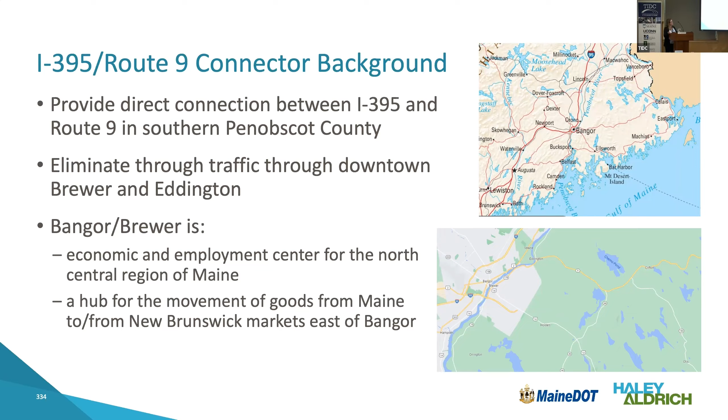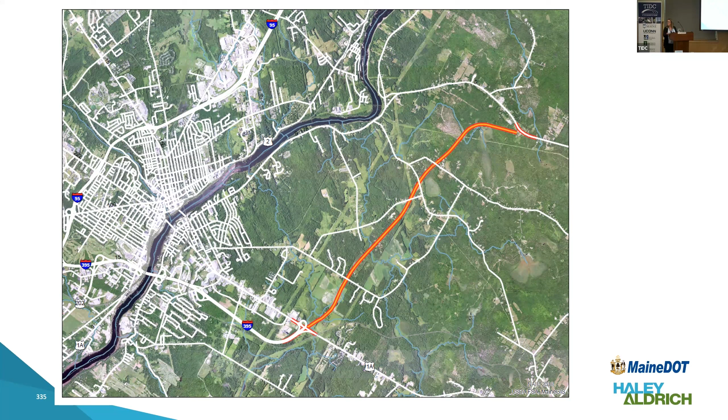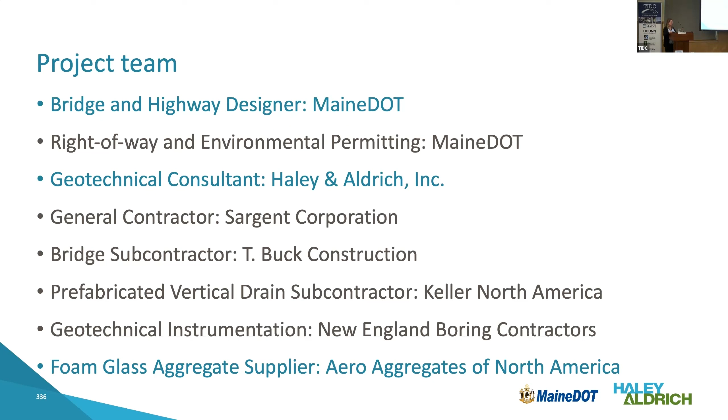If you've noticed in the news, the Philadelphia bridge that collapsed earlier this year—Aero Aggregates provided foam glass aggregate to fill that span and get the roadway opened temporarily. So they were instrumental in that project.

The project is 6 miles long of new roadway, which is a little unusual these days. There are embankments over compressible soils, which is really the focus of what I'm talking about today—there are 3 areas we're calling special embankment areas. In addition, there are roadway crossings: snowmobile, stream, wetland, and wildlife crossings.

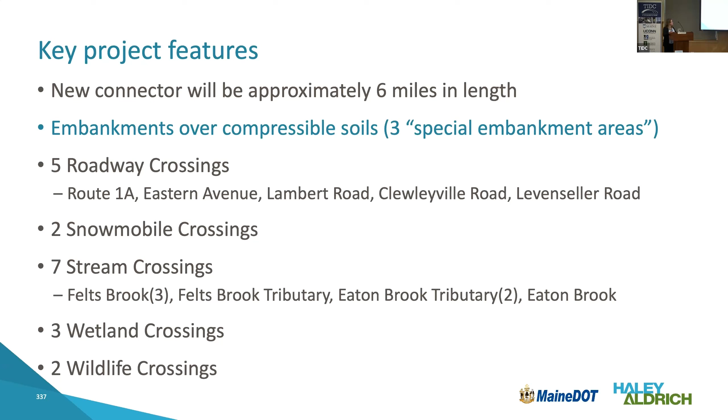The timeline started all the way back in 1998 when the DOT and FHWA began a corridor study. An alternative was chosen in 2016, and then the design team started work in 2018. Final design was complete and the project was advertised in the fall of 2021. Construction started in January of 2022, and it's ongoing now - we're really in the throes of it. It's on schedule to be complete in July of 2025.

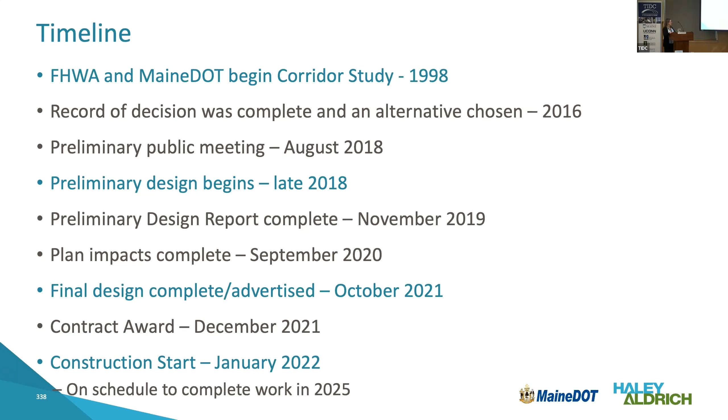We did a lot of subsurface explorations - borings, geophysical testing, and CPTs. We had about 250 borings along this alignment to fully characterize everything.

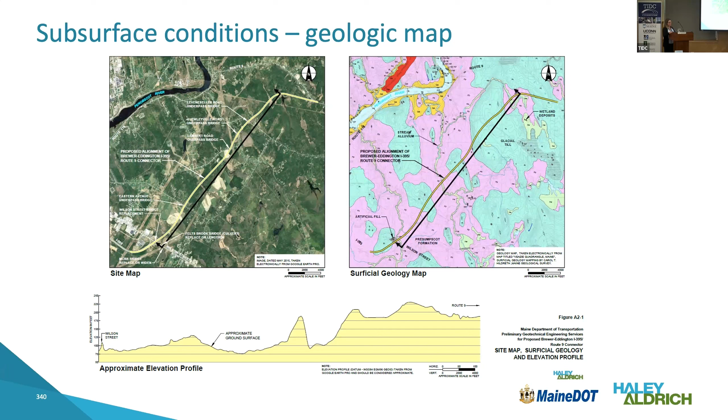This is just one typical piece of a profile to show the subsurface conditions. Here it's coming off some of the embankments at the southern end of the project. We're placing new fill to meet those existing embankments, and that's being placed over this marine deposit that is fairly soft, shown as the blue deposit. Below that is glacial till and bedrock.

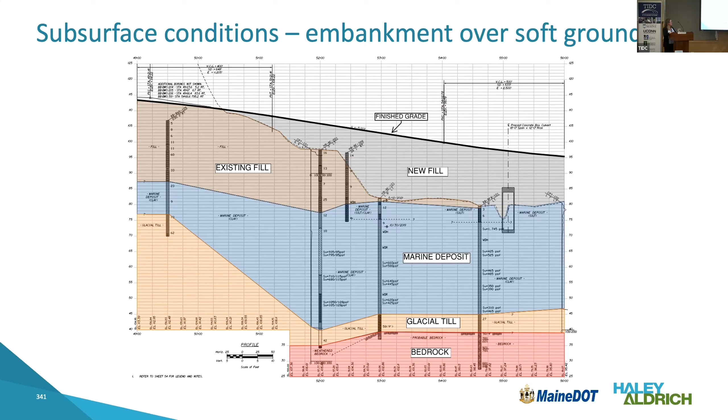As far as the general process went, we identified 4 areas that had clay - up to 34 feet of fill over a range of clay thickness, up to 42 feet. Through the preliminary and final design process, we were able to eliminate one of these areas, so only 3 required special construction.

We assembled all our field and lab data, selected soil properties specific to each area, and performed settlement evaluations compared against the project criteria that Maine DOT had provided. We also performed global stability evaluations, both temporary and permanent. The temporary evaluations actually controlled the design in many areas because we couldn't place the full height of embankment fill and have the embankment be stable.

So we needed to place a part of it and let the clay gain strength before we could place the full height of fill. That definitely impacted some of our design decisions.

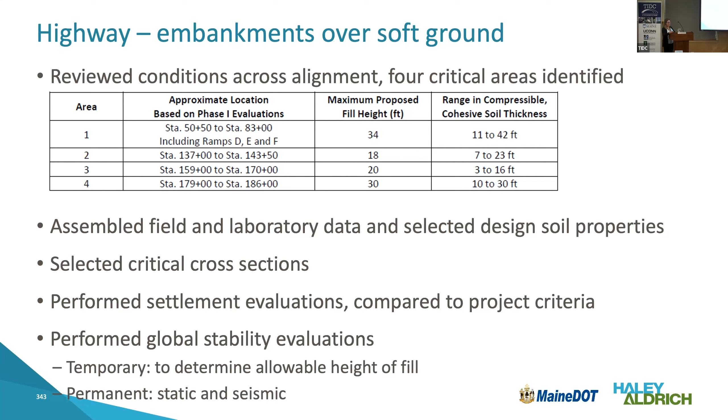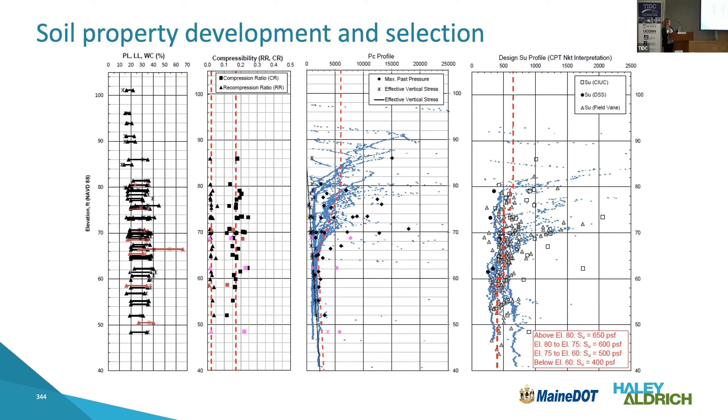This is just a summary of some of the soil conditions in one area. It shows the magnitude of data we had from both in situ field testing and lab testing. For geotechnical engineers, the selected undrained shear strength ranged from about 400 to 650 PSF in the clay at this particular location - so fairly low strength clay.

The approach we selected is primarily a preload surcharge program - placing fill, letting it sit for 9 months to get the settlement out before constructing the final roadway surface. We needed to do some load balancing because we couldn't place all the fill at once, and sometimes you can have a second hold period - place fill, let it settle, then place a second stage. But the project schedule didn't allow that.

So in our second stage, instead of placing all normal weight fill, we did a combination of normal weight and lightweight fill.

The program includes prefabricated vertical drains installed through the clay, which accelerates consolidation - normal weight fill for stage 1, then normal weight and lightweight fill for stage 2. We're monitoring performance of the program with geotechnical instrumentation.

There were 2 culverts where the sequencing didn't let us put the wick drains in, so it made more sense to use a full height lightweight fill there - the entire embankment adjacent to those 2 culverts is constructed of lightweight fill. The selected lightweight fill option is foam glass aggregate.

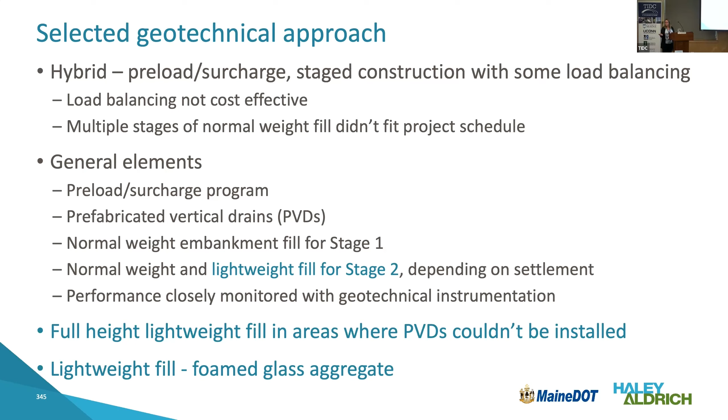Here's a typical cross section. During the initial fill placement, you'd place it up to the red line here, normal weight fill, let it sit for 9 months or so, and then excavate back down and place lightweight fill in that yellow area. So the finished embankment, and that detail varies along the length, but you end up having lightweight fill in the upper portion of the embankment.

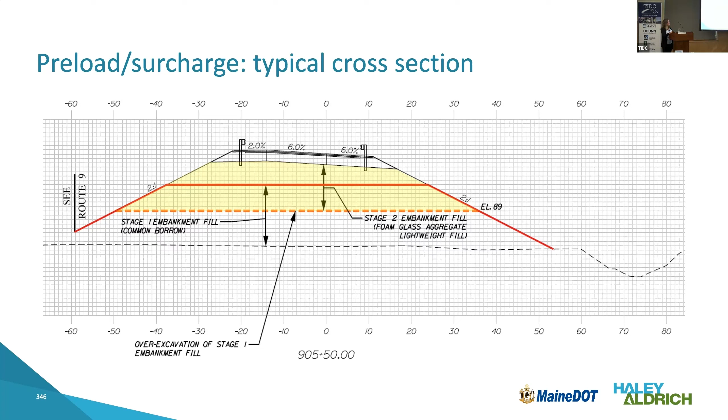Here's a profile through the 2 culverts I mentioned. Here the lightweight fill is included for the whole height of the embankment, except for the roadway section on top, where there's about 2 feet of normal weight gravel and the pavement on top of the foam glass aggregate.

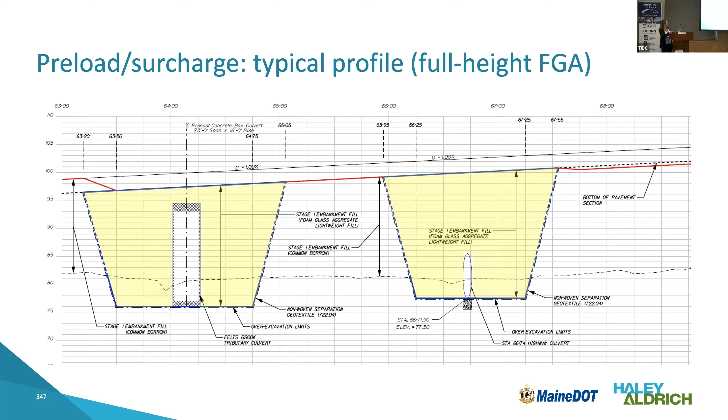So the next group of slides, Aero Aggregates provided, and they're the ones producing this and really have the data, so I want to give them credit here. Archie Filshill is their founder and CEO, and is always very happy to talk about this product. He's provided me this information.

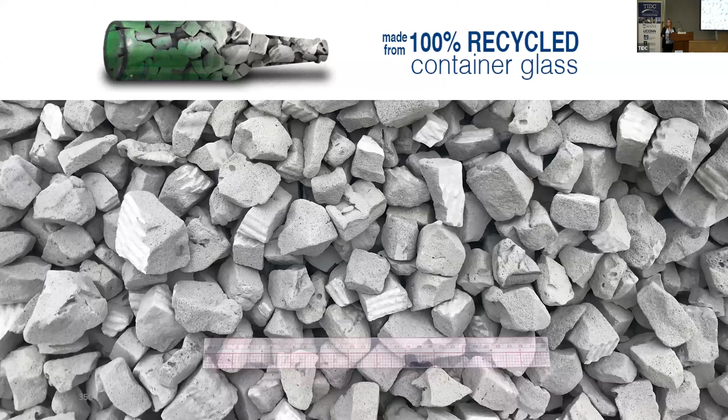So this is what it looks like. Those aggregate pieces are about 1.5 inches in diameter. But it really is not that different from a normal aggregate, it's just a very different weight, and it has definitely different properties.

So here you can see it weighs only 15 pounds per cubic foot compared to normal weight fill, which is 120 to 130 pounds per cubic foot. So it really helped with our settlement challenges on this project.

And it has a very high friction angle. They have test results that show it has a friction angle of about 54 degrees. We did not use that high of a friction angle, just given that it was a little bit new to us and new to Maine DOT. In addition to that, it's a good insulator, it's frost resistant, and it's very free draining.

Some of the earlier applications of the product were for some of these other reasons.

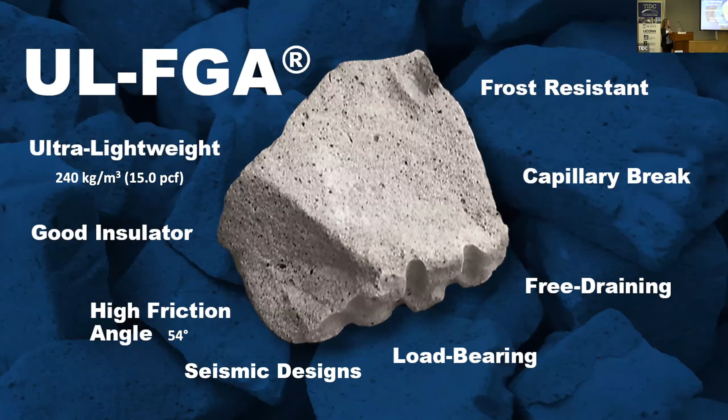So the process of making the material: they start with recycled glass, just normal bottles and jars that we all recycle. They remove any paper or metal or anything on it, and then they pulverize it into a very fine powder. Then they mix in a very small amount, like 1% of foaming agent, which is also a powder. So they have this mixture of powder that they lay out on a conveyor belt in a thin layer, and then that passes through a kiln that softens the material, which he described as sort of like baking a cake.

So on the other side of the kiln, the conveyor belt comes out with a cake-like material. In the heating process, that foaming agent has now created bubbles in this material, so it comes out in kind of a sheet with bubbles. And then when it hits the cooler air inside the facility, that causes it to crack. So they don't need to do anything to process it and crack it, that just happens with the thermal differences.

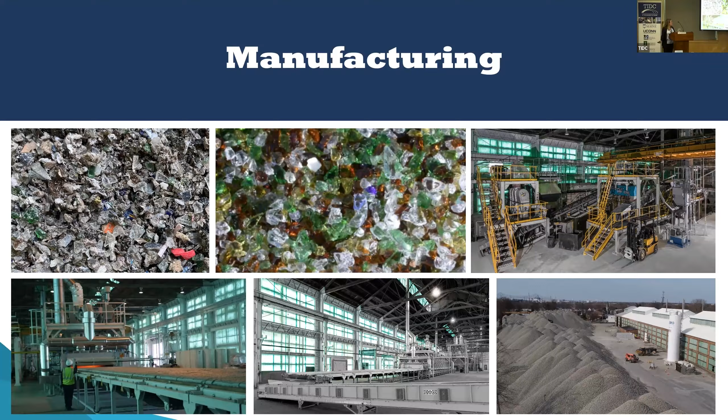The product primarily started in Germany in the 1980s. In the 90s, though, Norway started using it as a thermal barrier, to prevent frost heave, and that sort of led to these lightweight uses or applications.

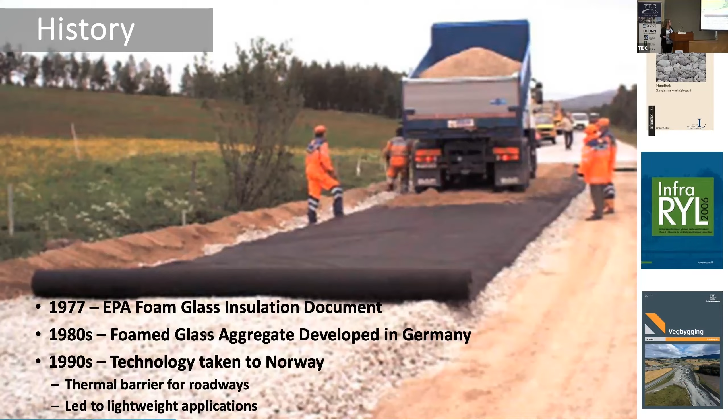So this just shows some of the applications. The top half are the infrastructure applications, so like we're using at Brewer, we're using it for embankments. We've also used it behind retaining walls and bridge abutments to reduce lateral loads on abutments. You can use it to backfill tunnels, culverts, and utilities.

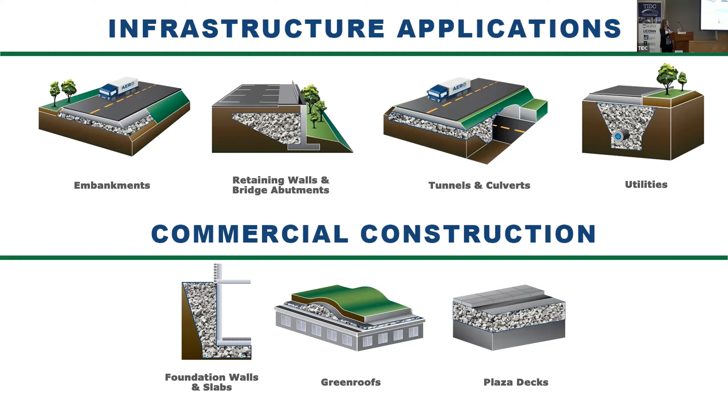The material, when it's placed in the field, rather than measuring compaction like you would for a normal kind of sand and gravel fill, is really placed using this method spec, meaning that we define certain lift thickness and means and methods, and then use that throughout construction.

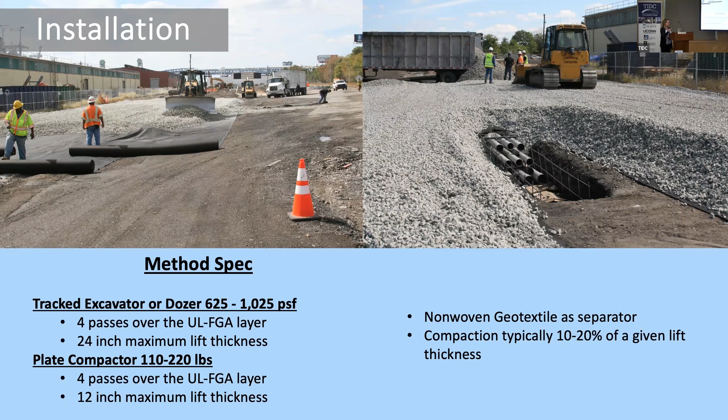So what Aero Aggregates recommends, and we're using on this project, is 24-inch thick lifts, and then 4 passes of some excavation equipment or site equipment. They have a certain pressure range that they want that equipment in, so you don't want something too heavy or too light, to target this spot of compaction. It's nice, it requires less compaction than normal aggregates, and it's thicker lifts, so it's less on-site handling and compaction compared to some materials.

These are just some guides. A lot of the guidance for using it in the US had initially come from these Scandinavian guides, and then it's been adopted here.

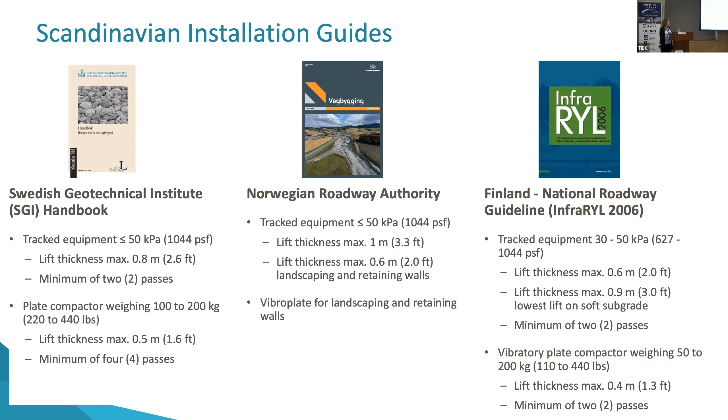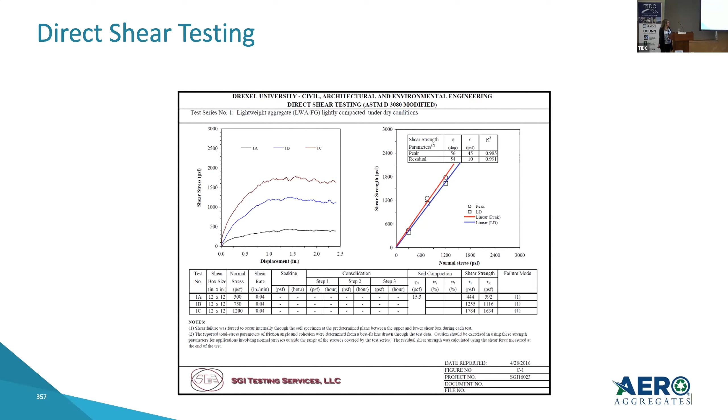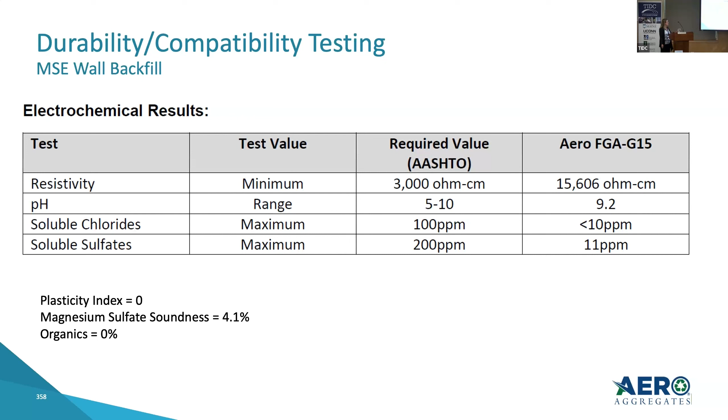This is some direct shear testing results, which show that it has a friction angle of 54 to 56 degrees. I'm sure Aero Aggregates has tons of strength data, this is just an example. They've also done some electrochemical testing to show that it's compatible for use in MSE wall backfill and doesn't cause degradation or any problems with the MSE wall reinforcement.

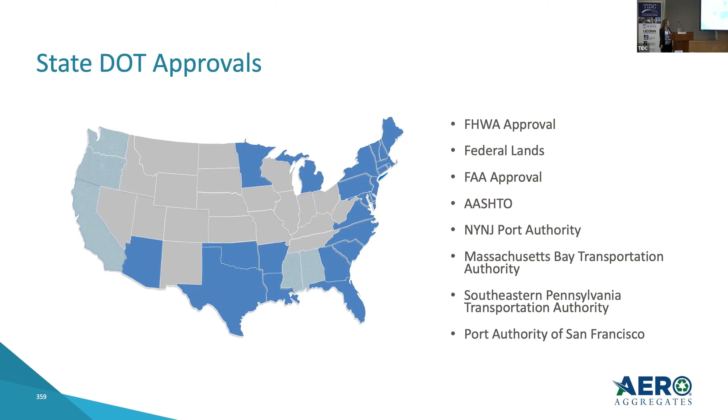As far as the Route 9 connector construction, it's underway. Last fall we placed foam glass aggregate in the two culvert areas where we had the full height fill, and places where we're putting it within the embankment during the second stage are ongoing right now. The total volume we estimate will be around 77,000 cubic yards in place, which is over 100,000 cubic yards delivered.

Before construction we did do a test pad. When they first started importing the material, Maine DOT, Haley and Aldrich, and Aero Aggregates had staff on site to do a test pad so people could see the means and methods and how the material behaved. That defined equipment, lift thickness, and number of passes. Throughout the remainder of the project, we've been following that same approach.

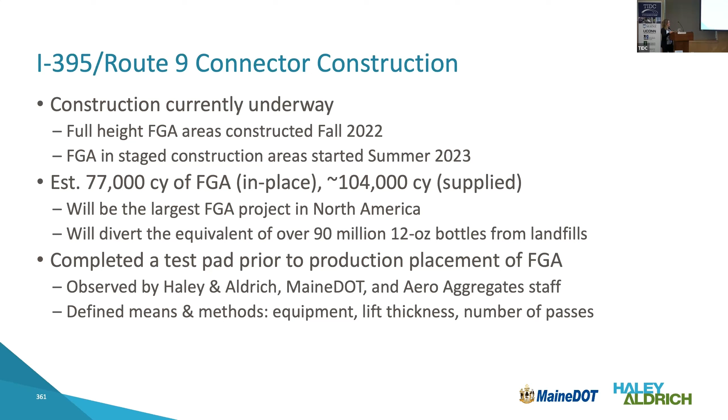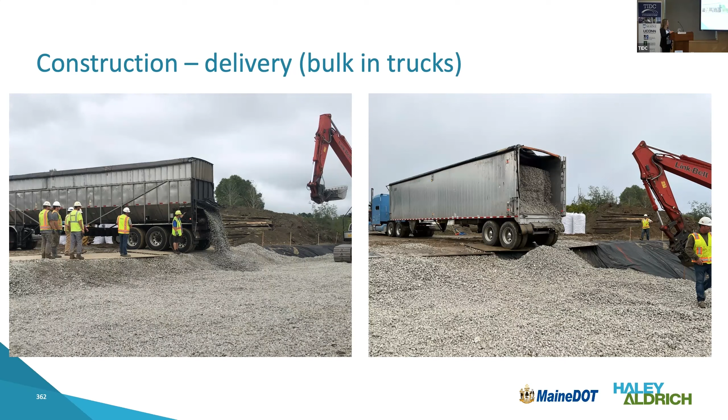Here are some pictures. It comes in really large trucks because it is so light, it's not limited by weight on the highways, so they can deliver quite a lot at once. You can see in the truck on the right, it's standing up almost vertically, which demonstrates the high friction angle that the material has.